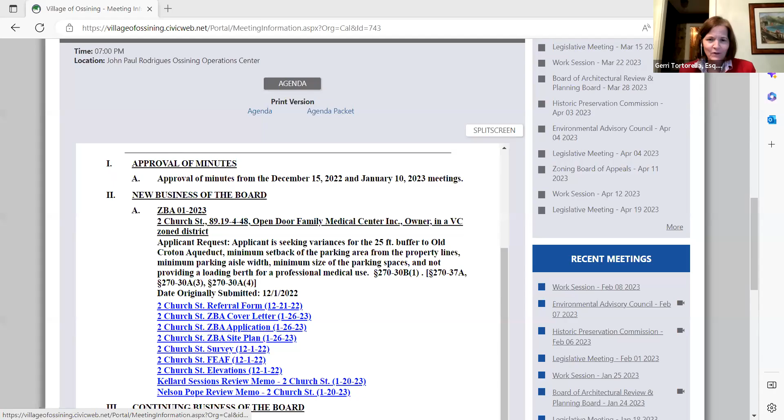And thanks for tolerating me appearing remotely this evening, I appreciate it. We're here on behalf of Open Door Family Medical Center. And I know that Chuck Utchik from Langan Engineering, if he has not arrived yet, will be arriving shortly. I know he's on his way there.

But if we can just start by giving you a brief explanation and some context as to why we're here this evening, then we'd like to present the site plan to you, or the aspects of the site plan that relate to our variance request this evening, and then I can take you through the criteria and why we believe the variances should be granted.

I want to also let you know that Lindsay Farrell, who's the CEO and president of Open Door, is in the audience. And with her is Michelle Naway, she's the Senior Director of Capital Projects. As I mentioned, Chuck Utchik will be joining us shortly. And Mike Tucker, who's also an engineer with Langan, may be on and may be showing the site plan for our presentation purposes.

Open Door has been a long-term member of the community and has been providing medical services largely to the underserved for decades now. As it approached its 50th anniversary, it started a study of its facilities in an effort to plan for the next 50 years. It started at a time where it wanted to make sure it was optimizing medical space and office space, and creating a state-of-the-art medical center to take it into the next 50 years.

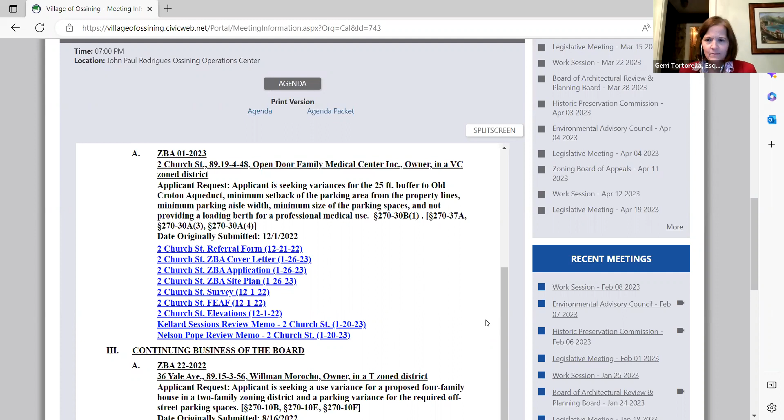Good evening, my name is Chuck Utchig with the firm of Langan Engineering. We developed the site civil engineering drawings to support these variance applications. I think we can present our drawing if we can.

Is Mike Tucker available? We're actually going to be handling the screen sharing going forward. But I'm sure Gerri mentioned there are 5 variances that we're after, and I guess at face value that seems like a lot.

But most of these variances relate to an existing parking lot. I'm going to go through each one of them, trying to show you on the site plan where they are and explain them to you. And then I'm going to pass it back to Gerri, and she's going to talk about the balance between the benefit to the applicant and the detriment to the community, which is this board's measure to analyze our request and make a decision.

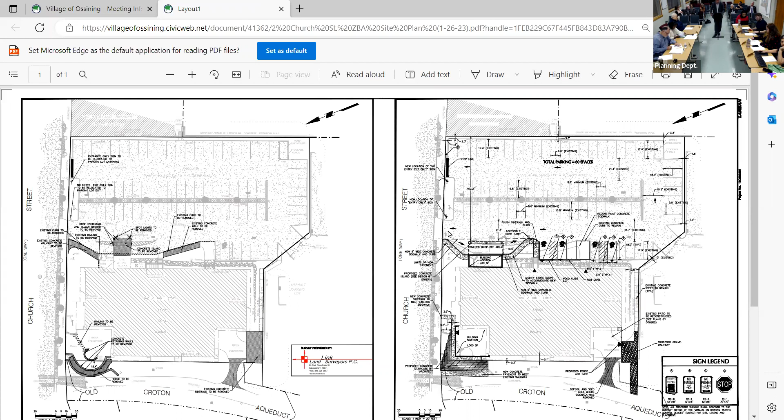The parking space sizes are deficient. Your code requires 9 by 18, and we have spaces that vary anywhere from 8 foot 6 inches to 8 foot 9 inches to 9 feet, so we're deficient in width. The length of the spaces are also slightly shorter than they're supposed to be - I think the deficiency goes from like 16.8 feet to 18 feet, so they're short by about 1.2 feet. This varies around the site depending on which space you're looking at. When it comes to striping parking spaces, sometimes a few inches here, a few inches there, but generally we're short in width and length.

But it's all existing conditions. In fact, on our plan in the bottom towards the building, you can see the handicap spaces, and the spaces we are creating are conforming in size to the ADA requirements. The other deficiency is in the parking aisle.

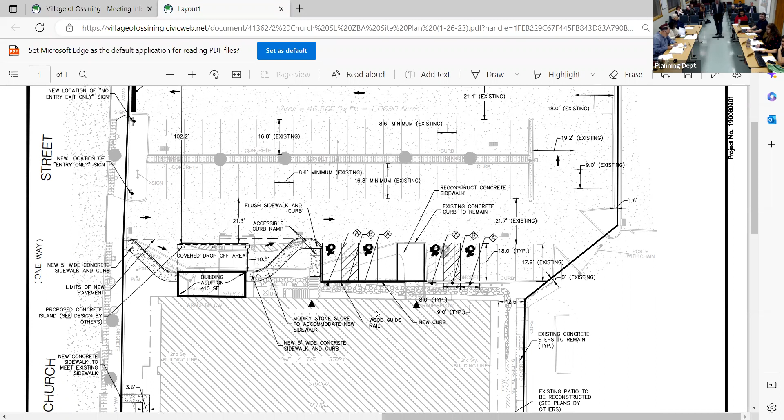So your code calls for a 24-foot wide parking aisle, and ours isn't quite wide enough. It varies from 19 feet to 21.7 feet. But your code also doesn't have a provision for a one-way aisle. So many times, a 24-foot wide aisle with parking on both sides is what's required. We have a one-way pattern, one way in, one way out, so drive aisles can tend to be a little smaller without really affecting how people get in and out of the spaces.

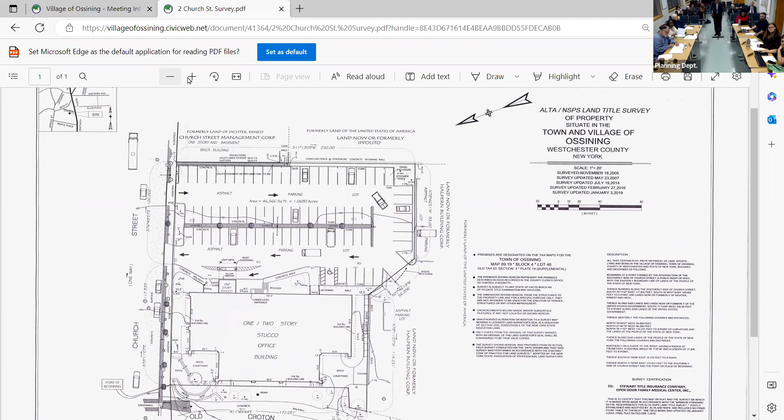So those are three of the existing parking lot variances. The other one relates to your requirement that parking be set back 2 feet from the property line. Here we don't meet that requirement. In the bottom corner there, if you zoom in, we're right on the property line. If you're familiar with this site, there's a connection to another parking lot, and our spaces are right up against the property line in that corner. As you go around the property, we're anywhere from 1.6 to 1.8 feet, and in some places over 3. So again, this existing condition does not meet your code requirement.

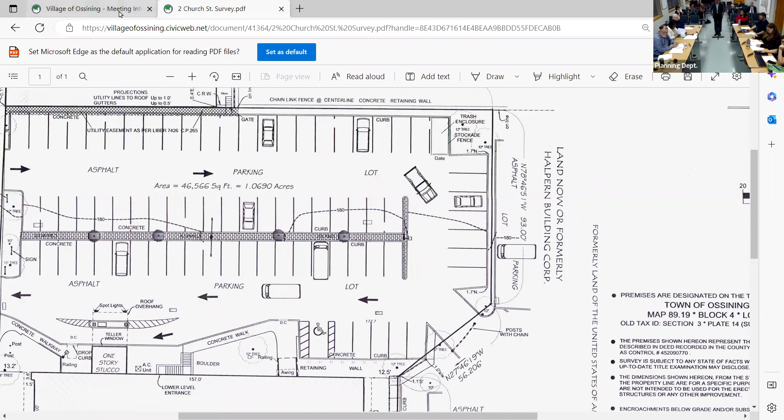So those are the variances that relate to an existing parking lot. For all intents and purposes, we're not changing it, and we don't want to have to change it. If you were to ask what it would take to bring this parking lot up to your standards, the impact would be fairly substantial. By the time we create the 24-foot drive aisle and the right depth and width of parking spaces, we could impact the parking on this site by potentially as much as 25%. The goal here is, this is an established entity in the community that's wanting to expand, and this creates more parking than they currently have. So as you add all these components up, we're hoping you'll conclude there's really very little negative impact in granting these variances.

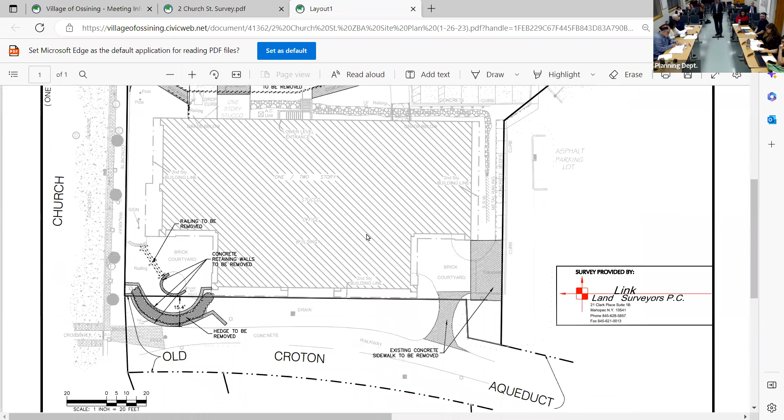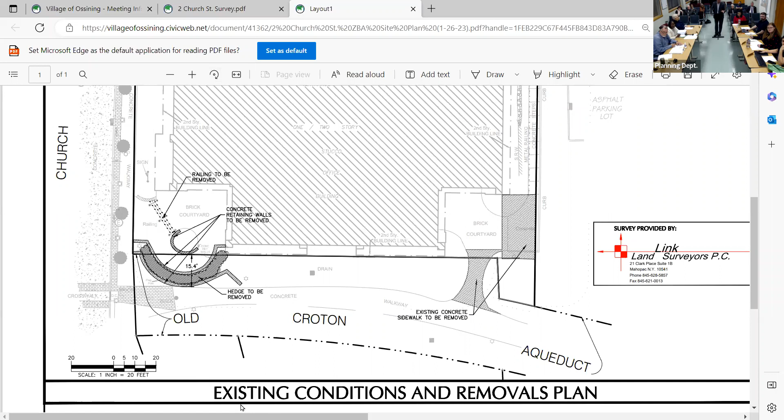The last variance is the relationship of our building to the property line. Your code requires a 25-foot setback from the aqueduct, and we're adjacent to the aqueduct. A majority of our existing building, if you look at the hatched part, is already within that 25 feet. So what we're proposing is to square off that bottom left corner and create a new entrance to this building that has a presence on the street. One of the goals here is to really give this building a connection to the street at that corner.

We also improve our functionality internally, giving better access to an elevator and a better entrance for people coming down Church Street. We don't have a ramp, so we can come right in at the right elevation to get to the entry door. There are functional benefits to doing this, and if you've seen the rendering, it's pretty spectacular. They're not cutting any corners in creating this presence. They really want this to be a focal point at this corner, and that was the goal. Yes, we need a variance. We are going to build to within the 25 feet, but not any closer to the property line than the existing building. That's the technical side of what we're asking for, and I'd be glad to answer any questions.

I would like Gerri to talk about the benefit to us versus the potential detriment to the community.

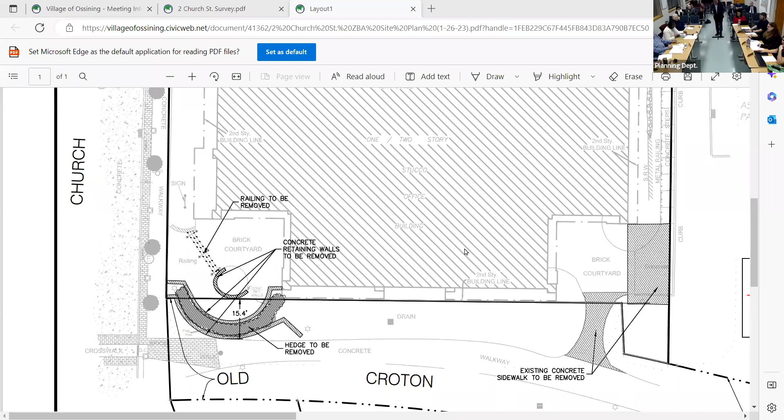There was one other, a loading regulation. Oh, you're correct. I'm sure one of my team would have reminded me. Okay, I'm helping the team. Still trying to catch my breath from running in.

So your code requires a building like this to have one loading space. We do not have a place where we can easily accommodate a loading space meeting your code's criteria for size, configuration, and access. Two points to take into consideration: one is that the existing facility at 165, in the back, has a loading dock, and that's where all the real materials will come in that need access to a loading dock.

Between the two combined facilities, we do have one. No, it doesn't meet code, but the intent is not to have significant deliveries done here. If a truck did come and had to make a small delivery, there is room in the drive aisle for them to stop, quickly unload, and go on their way, and cars could still pass them in the aisle. So the intent really is not to have significant deliveries here, and if by chance a delivery truck comes, it'll be a quick unload, not a lot of supplies. So this balancing act that you're all familiar with, we hope tips to our side on this issue.

So that's the last of the variances we're asking for. Question: how many more parking spaces, just so everyone hears it? How much more than what currently exists are you providing? I think at the end of the day we add, I want to say, 4 or 5 additional spaces. I think there's 77, and we're getting it to about 82, but I have to verify.

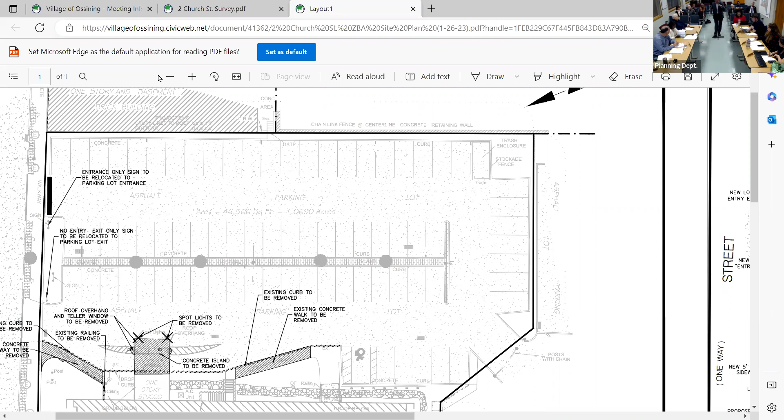It doesn't really result in any variances, but you're all familiar with the site. There's a bank there and it has a drive-through, right? The goal is to convert that drive-through to a patient drop-off. I'm not completely familiar with the current operation, but I understand that drop-offs now can affect traffic a bit at the existing 165. We're hoping this will actually improve that. People can come in, drop a patient off at the front door, and then go find a parking space.

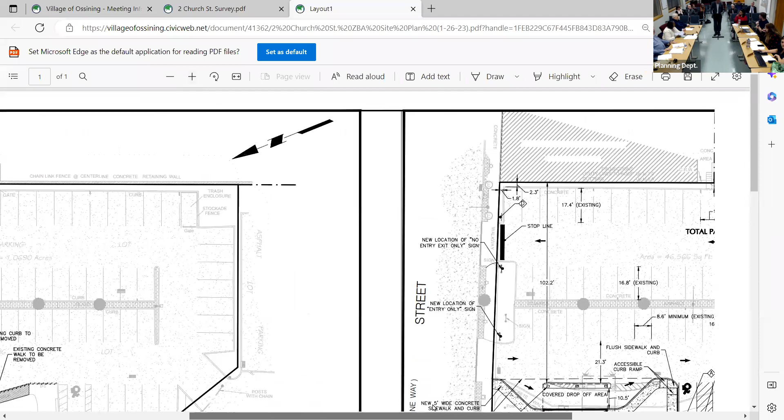So the bank's not there anymore? The bank will not be there anymore. And the other offices, the rest of the building, I know had kind of a mixed use - it's all going to be medical office.

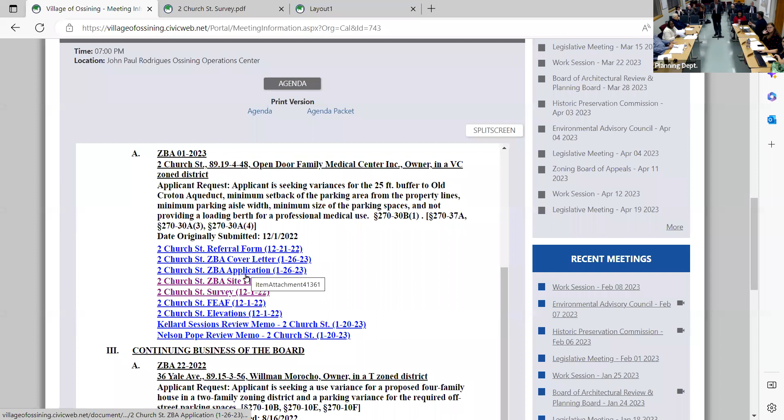Correct. So for the benefit of the board and the community, would you mind showing the architectural drawings, since you referenced the change, which is both in character and also now you're going to be up to the street. Let's have people see the difference here that you were referencing.

I think it's the next one. No, after that, keep going. There it is - the 3D ones. So that's the corner, and this is the trail. As you look into the drawing on the right side, that's going up the aqueduct, and the other side is the street. So in essence, you can see the fan-looking portion of the building.

That's the addition, and then there's the stairs going down to the aqueduct. We're going to take out the older things that are there, and hopefully open it up and make it look like a spectacular entrance to this building. The aqueduct itself will act as it does now, with people walking on it as they normally do to recreate.

What about these folks - are they going to still be able to do that? Yes. And will there also be entrances into this building from the aqueduct? The entrance to the building - if you see the two shadows closest to the building next to each other - that's the door, and that's the point at which the grade is generally level with the street. You could walk up the aqueduct, come to the stairs, walk up and go in the front door, or come from the street up the stairs and go in the front door. We don't change the current experience on the aqueduct itself.

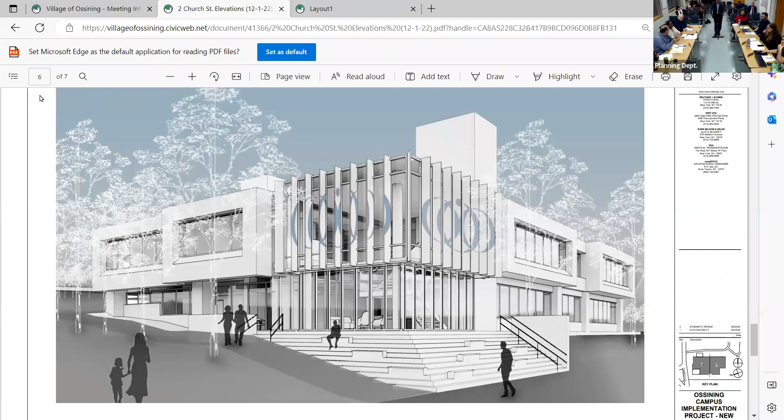My other question was about loading docks and things of that sort. This is a medical facility, so I'd assume there's going to be some fairly heavy duty machines that need to go into the building to perform its function. Is that true or not? At the onset, they'll be able to do that. Yes, that's not a problem at the onset.

We will take up most of the parking lot. All our tenants will be gone, so there'll be no one parking in the parking lot. So we will use the parking lot to mobilize for construction. We still have a bit of work to do to figure out the logistics of construction at that corner, but from the perspective of bringing in everything that needs to go into the building, we'll do that.

I have one last question. As you stated before, there's a limited amount of parking now, and these variances you're asking for will actually increase the parking spaces. Will that increase in parking spaces be allotted for your employees? I know right now with your limited parking, some of them end up on Maple Street. Is that going to be patients only, or can employees use it too?

We're not going to differentiate spaces at this point, so it'll be open to all, first come first served. Obviously there's a large portion of the patient population that arrives by public transportation, so I think some of the folks that work there will park there as well. Just because I've got a couple of elderly relatives on Maple Street, and sometimes it's hard to find a space.

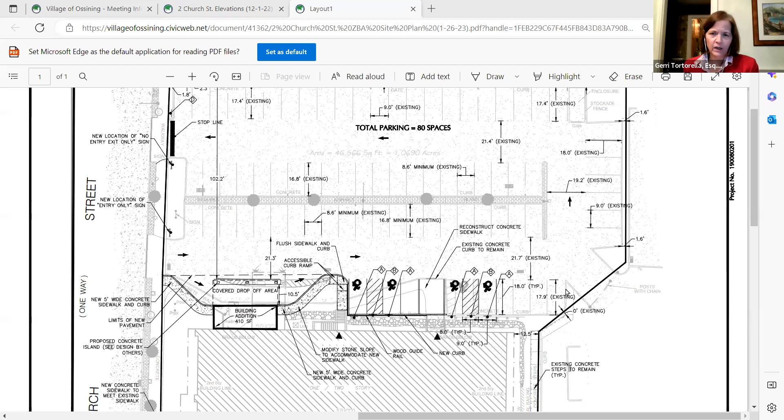So there'll be a more open area as well. We're proposing to put new concrete down in the area we're opening up so it can meld nicely with the existing aqueduct pavement. You can see that on the site plan, the half circle shaded underneath the stairs, and the relationship of the stairs to where they end, versus the existing improvements which butt out closer to the aqueduct. That, coupled with removing a lot of the overhanging vegetation and opening up the area, I think will create a more inviting experience in that location.

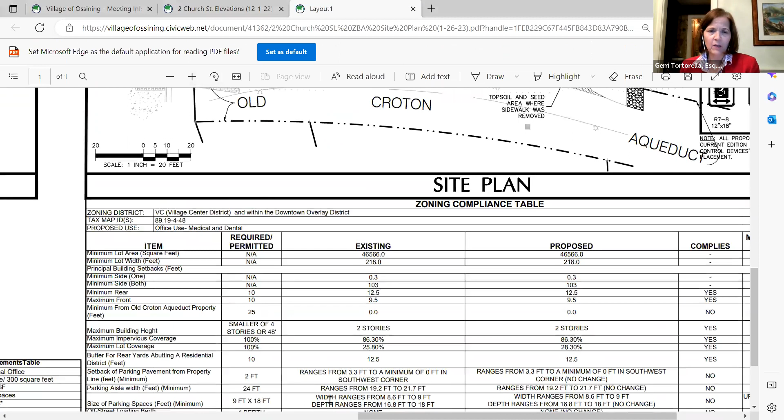One of the intentions with the architectural design was that we would also complement the downtown revitalization initiative you're undertaking, because we want to make this a nice statement along the streetscape and in the vicinity of the Y intersection, and have the two buildings, 165 Main and 2 Church, speak to each other, so there's some commonality and relationship between them.

In terms of deliveries, we mentioned in our submission letter that to the extent large vehicle deliveries are required, we are able to schedule and coordinate those. We control the building, so to the extent it needs to block any parking or whatever, it will be for limited periods of time, and we'll be able to control that through scheduling. So I think we're dealing with the lack of a loading berth in a responsible way that won't impact anyone.

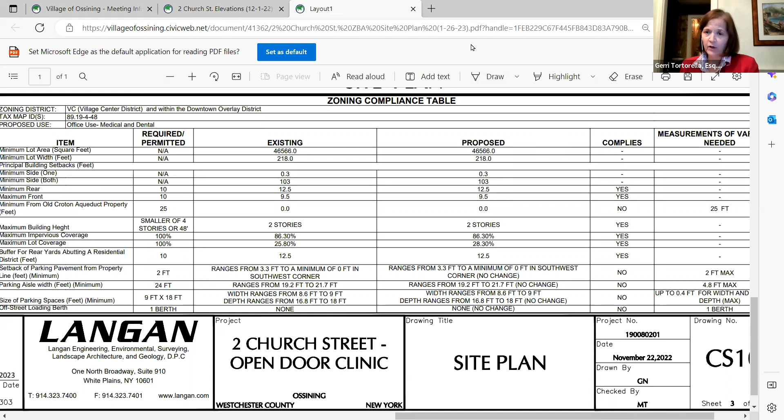When looking at the impact on community character, it's a salient point to remember these are existing conditions. We are not proposing any new improvements other than replacing the existing improvements near the aqueduct with the building construction, to square off the building so we can create an appropriate entrance. There really is not an appropriate entrance into the building at that corner at this time. You cannot get to an elevator with any ease. The first and second floor are not linked to one another. All of that will be accomplished when we're able to square off the building and create this new entrance.

And we're doing it in a way where we're not losing parking, we're not jeopardizing existing improvements and the utility of existing improvements, and we're making functional space in that location, in an aesthetically pleasing way that contributes to the character of the downtown area. There's nothing inconsistent with what we're proposing in relation to improvements in the area, so we're certainly not creating a detriment to the use or enjoyment of surrounding properties. We don't have a delivery loading berth now, so it's not like we're taking one away. And we are improving the handicap access on the site, so we think all of those are very positive improvements.

We are not losing parking. So I know the comment was made that now's the time to make sure we conform. I just want to make sure the board understands we're not seeking a parking variance from the board. We're just trying to legalize existing conditions, largely because we are before the board, and this is an opportunity for the boards and the administration to bring this site into conformity with existing improvements.

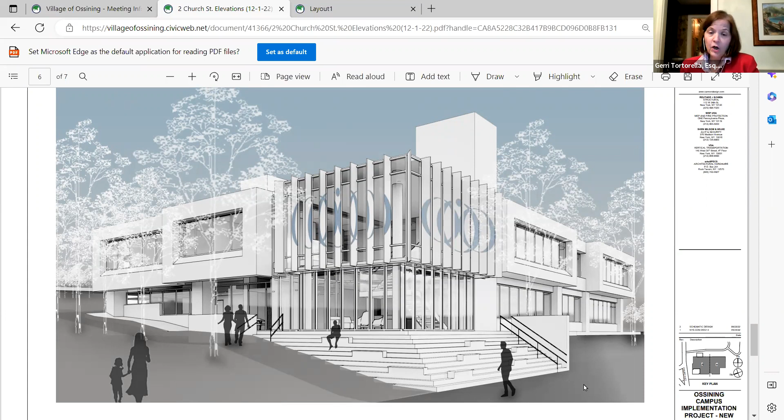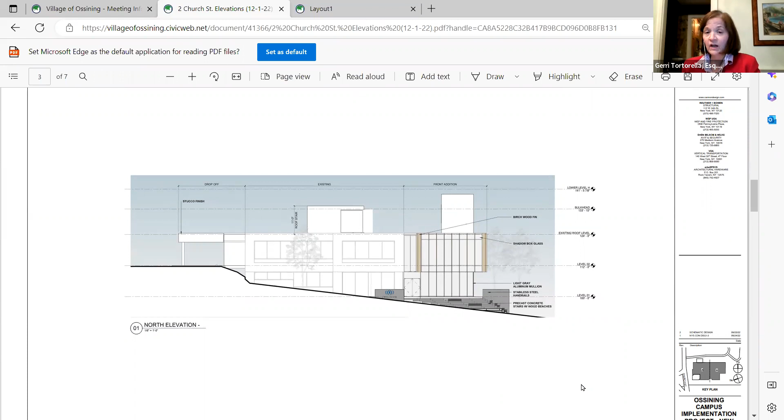As Linda indicated, this is a type 2 action, so it's presumed not to have an adverse impact on the community. Under the law, when you don't have an adverse impact on community character, the magnitude of the variances becomes less of a significant factor. So yes, we have 5 variances we're seeking approval for, and numerically they may seem significant, but where they don't have any impact, there's really no grounds to deny the variances on the basis of substantiality. We've briefed in our submission the grounds for the variance.

We're happy to answer any other questions. But I think your questions really elicited a lot of the information we wanted to make sure you were focusing on. Okay, thank you.

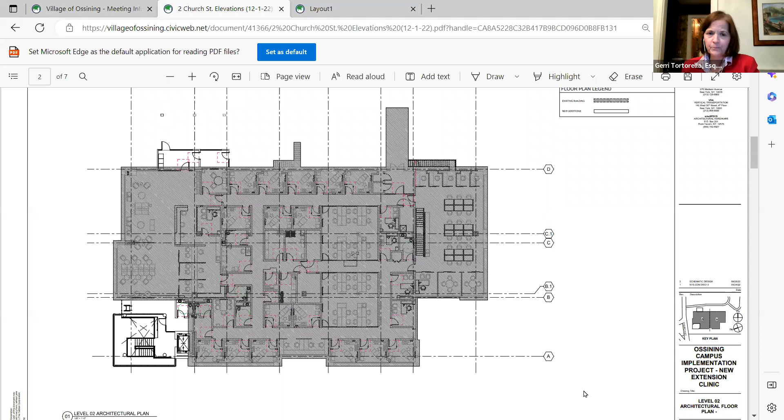It was very low, but we did kind of hear what you were saying, and we understand the majority of this. By full disclosure, and I did tell Leslie when I came in, I think I've seen these plans about 10, 15 years ago, when they first bought the building and were looking at doing something with 2 Church Street. I was sitting as a trustee way back when, so I think I had seen them years ago. So I kind of have a different visual than most people sitting on the board. I understand what you're saying.

Joe, I see your hand is raised. Yeah, I do have a question. How, the addition that's... can you hear me? No. Can you hear me or no? It's very low. My question is, how many square feet is the square footage of the addition that's proposed?

1,000 square feet. So is that calculated and contributing to the need of more parking? It is. The board can choose, they're going to vote and so forth, and I understand it's not a parking variance for the number of spaces, but in the existing conditions of the building, when you calculate it out, it would come out with one number of parking spaces, and with the addition, when you calculate it against the village code...

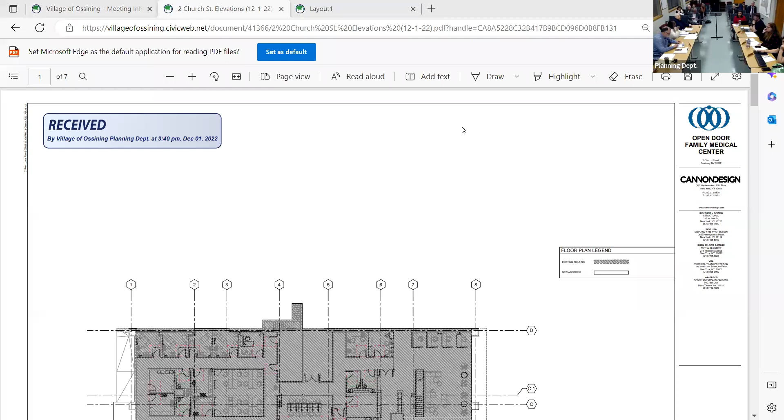Okay, so we're ready. The next factor is whether the proposed variance will have an adverse effect or impact on the physical or environmental conditions of the neighborhood. No, I do not think it will have an adverse effect. I think visually it ties the two buildings together. It's actually an improvement on the streetscape, on the aesthetics, yeah.

Agree. And then the fifth factor is whether the alleged difficulty was self-created, which consideration shall be relevant to the decision of the board, but shall not necessarily preclude the granting of the variances. I used to misunderstand how this is read, but I get it now. Thank you, Linda.

It is not self-created because they're pre-existing. The code has changed and it is what it is now. But also the buffer, they don't determine where the building is. It's already encroaching on the buffer. The pre-existing plaza is already encroaching on the buffer. That's not self-created. The parking lot is existing and that was not self-created. They purchased a building built in 1977, and it is what it is. So they are asking for improvements for a building that already exists.

I think the only thing we missed, Taryn, and Linda's probably jumping in her seat, is going back to the loading berth delivery issue. I think that's the one relevant point John brought up, which is anything we decide today in a variance lives with the building until somebody changes it in a way that forces them to go back through the process.

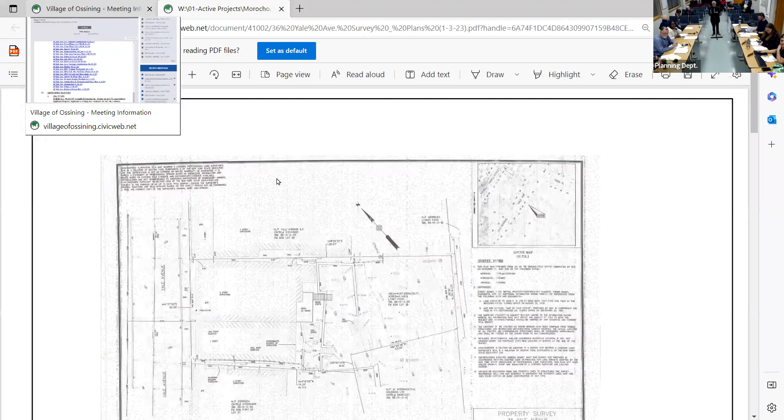Keep going. Got it. Oh, no. Well, actually, go back to that front elevation, I'll just make a quick comment about that.

Okay, it's loading. Oh, okay. Yeah, I'm waiting for it.

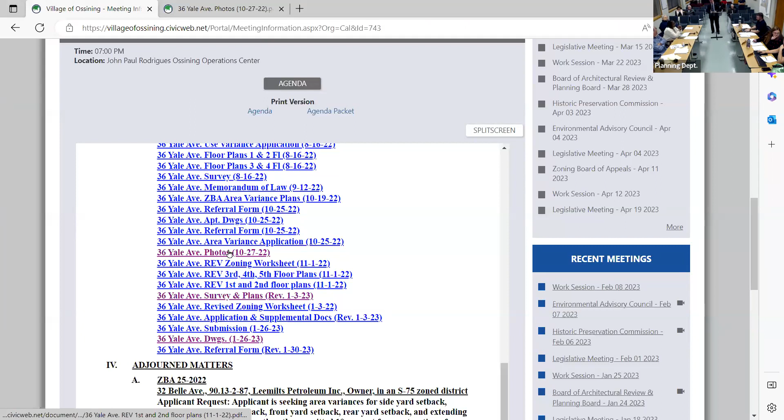I do see in the paperwork, and it was kind of buried in the paperwork to the board, there was a pro forma kind of piece of paper stuck in there with the 2 apartments, 4-bedroom and 4-bedroom. However, none of the rent, he didn't change the rents, he didn't change anything about the amounts going in. And I was kind of, I mean, if you're giving me a 2-bedroom, and I would assume a 2-bedroom duplex going in the village of Ossining, I would assume, and this is just me speaking, that you could probably rent a 2-bedroom duplex for about $5,000 a month. But a duplex in this building, I'm only going by what he wrote on this piece of paper.

Okay, but I just want to clarify that. So you'd be talking about a single unit with 2 levels. Yes, and so 2 of those, which would require a considerable amount of construction to the building itself, because each of the floors are self-contained. There's no means of access to another floor, only exiting.

So I'm asking the question because there would be no use variance, we would not have to do a variance for the number of apartments in this building if you did it that way. That's accurate, I'm putting it in the atmosphere. And by the paperwork that he submitted, because he kept the rent as if it were a smaller 2-bedroom or a smaller 4-bedroom on the 3rd and 4th floor, I'm just looking at his paperwork. He didn't change the amount of rent that he would charge. My question would be, if he increased the rent, would he then be able to make his numbers work at the end of the day?

Also in his paperwork, he put in depreciation and landscape, and I looked at those pictures and I don't know what landscape he's talking about, except for the grass that may grow up between the sidewalk, because literally he's on the sidewalk and he could spit and hit the building next door. So there's really no landscape.